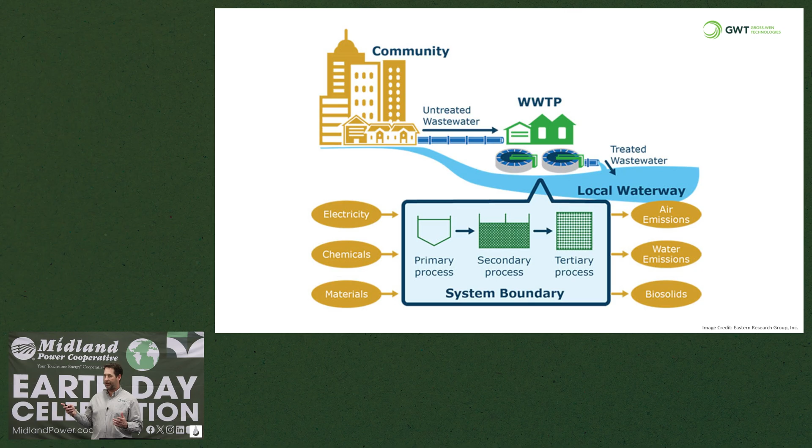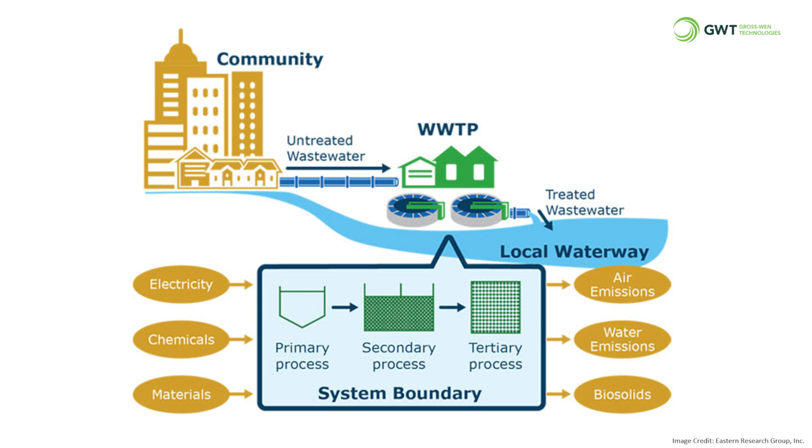So it takes electricity, a lot of electricity, and I think I'll prove that to you here shortly. We also add chemicals, all sorts of different materials into those wastewater treatment plants to create clean water to be discharged. It comes with air emissions. We're creating a biosolids product also that needs to be discharged. So it is a very energy consuming process.

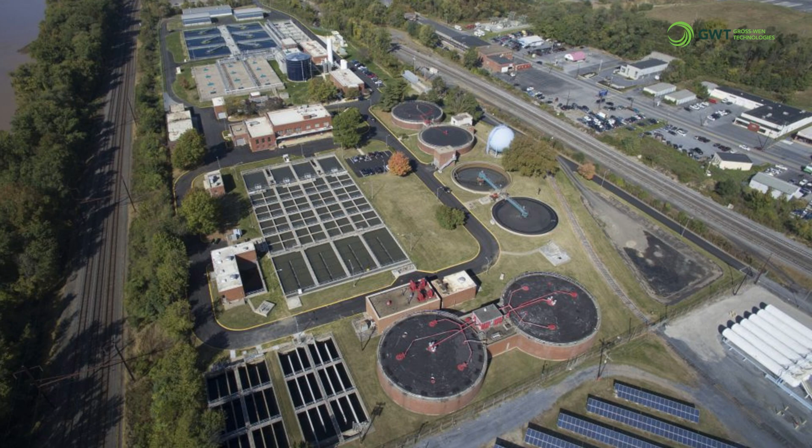This is a typical wastewater treatment plant at probably a mid-sized community. You can see it's a series of tanks, blowers, chemical addition equipment, drying equipment. Very, very complex in some communities.

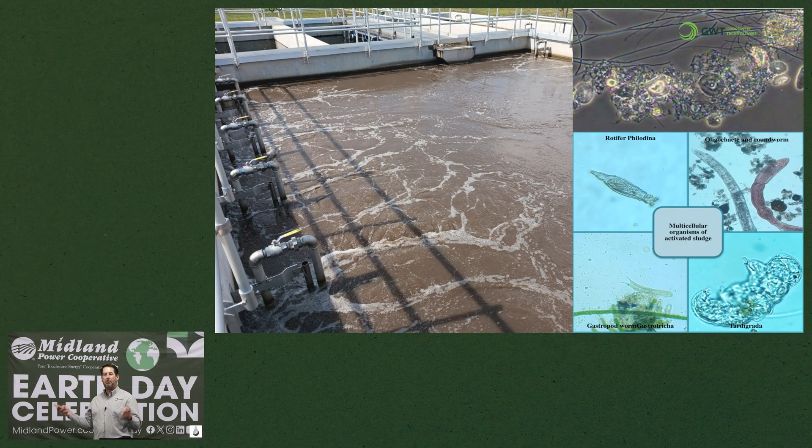Essentially, what we're trying to do in wastewater treatment, and this has been going on for 100 years, we've been trying to blow air into wastewater to create bacteria that will consume the organic material in that wastewater. Okay? Well, that bacteria is just like you and me. It requires a lot of oxygen, and it expels CO2 to the atmosphere. So we blow air into it continuously, 24 hours a day, 7 days a week, 365 days out of a year.

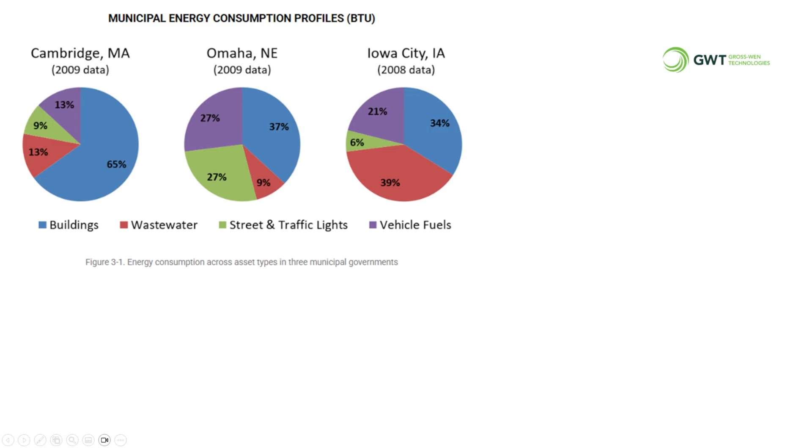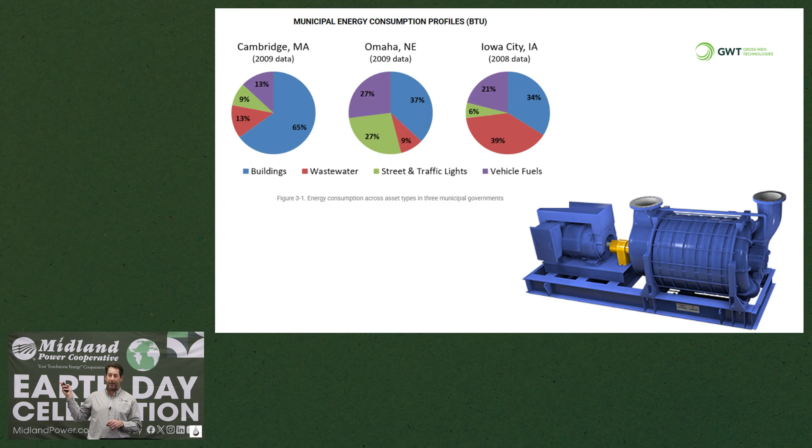In fact, for some communities, their government energy budget, which is comprised of heating and air conditioning buildings, powering street lights, traffic lights, all those vehicles that are out maintaining community facilities, and wastewater. Wastewater can represent up to 40% of a community's energy budget. That is a massive amount.

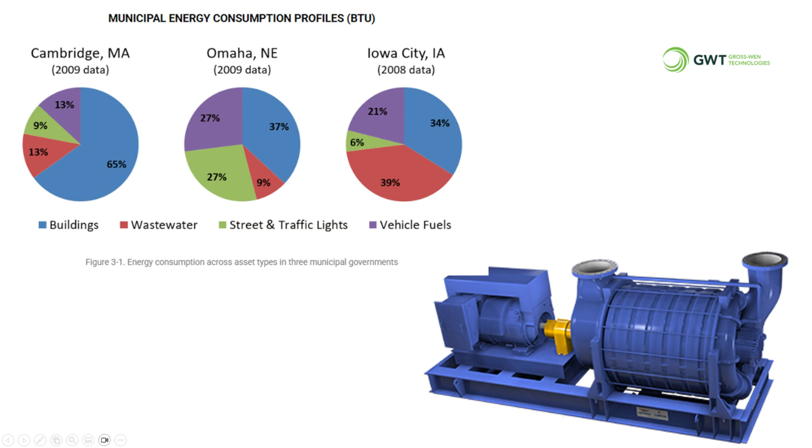In fact, if you think about our total greenhouse gas emissions worldwide, wastewater represents about 5%. That's 1/20, a massive amount. So we have a big problem and a big opportunity.

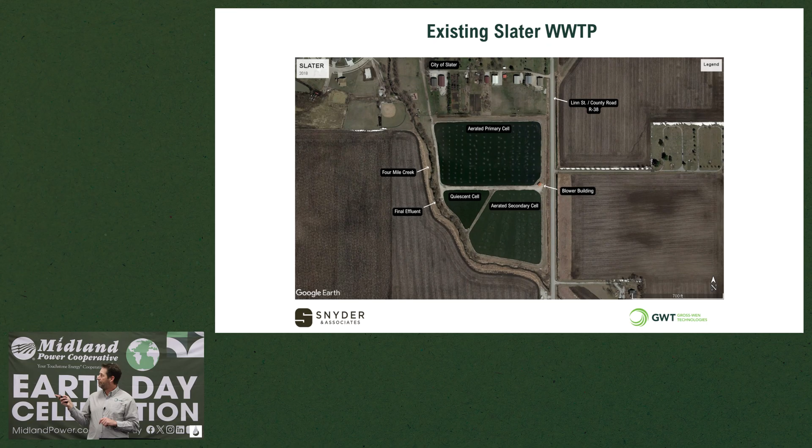This is a picture of Slater, where we have an installation, and this was their wastewater treatment plant prior to us getting involved. So it's a 3-cell lagoon. The primary cell has a series of blowers blowing air to create that bacteria. Then it flows to the secondary cell, and then the quiescent cell before going to the creek that is nearby. They had 3 blowers at 75 horsepower each, blowing air 24/7.

The state recently gave them new permit requirements. So they were meeting their ability to remove organic matter from the wastewater, but they were not able to meet their ammonia limits. Ammonia is a form of nitrogen that, in nature, is food for algae blooms, along with phosphorus. Right? We hear about those on the news all the time, where we've got a harmful algal bloom. No swimming. It's bad for aquatic animals, and so we're trying to get that ammonia out of our wastewater before it's discharged to the environment.

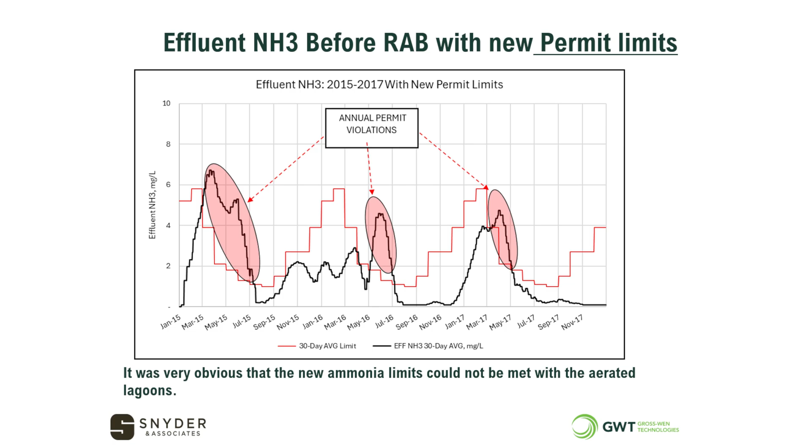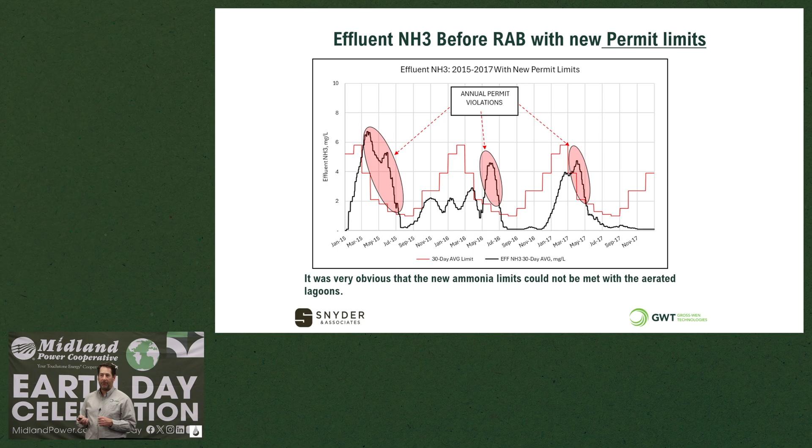So as you can see, in the 3 years prior to us getting involved, they were not able to meet their permit limits, shown in red. Obviously, it's seasonal. It changes, summer and winter. They were not able to meet the limit at certain times during the summer and winter.

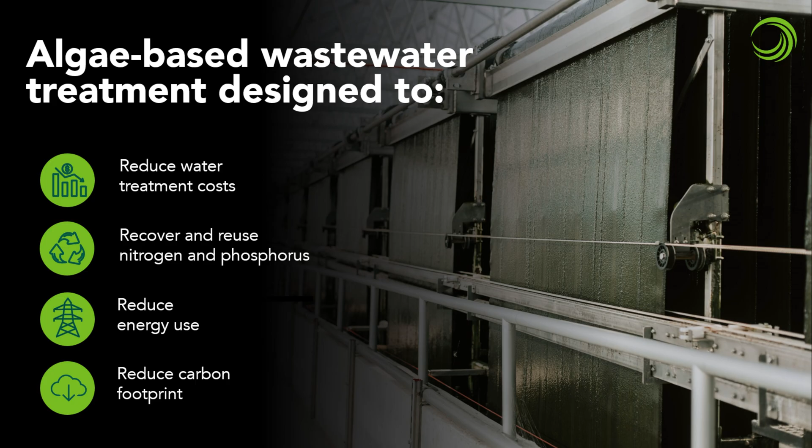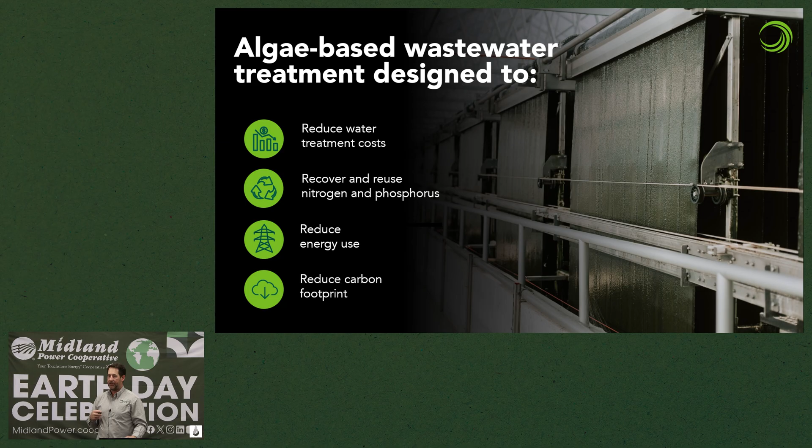So a little bit about what we invented, like I said, 10 years ago. We recover nitrogen and phosphorus, because those are valuable; everybody needs them for growing plants, right? And we're able to reduce the energy required to treat that wastewater. I mentioned bacteria expels CO2 to the atmosphere. Algae, as a plant, does exactly the opposite. It consumes CO2 and releases oxygen. Exactly the opposite.

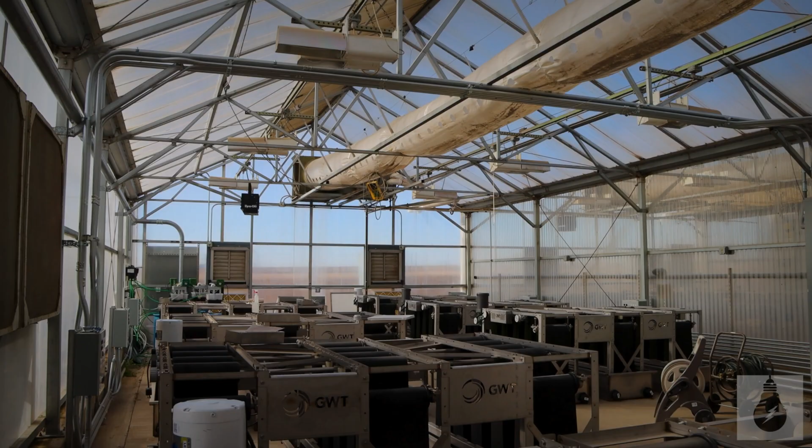Today we're in our research and development facility just outside of Boone, Iowa. It's a greenhouse that allows us to test our system on various wastewaters and how we can manipulate the algae to grow in a certain way that would maximize treatment, or to maximize the effectiveness of the end-use product that algae can be turned into.

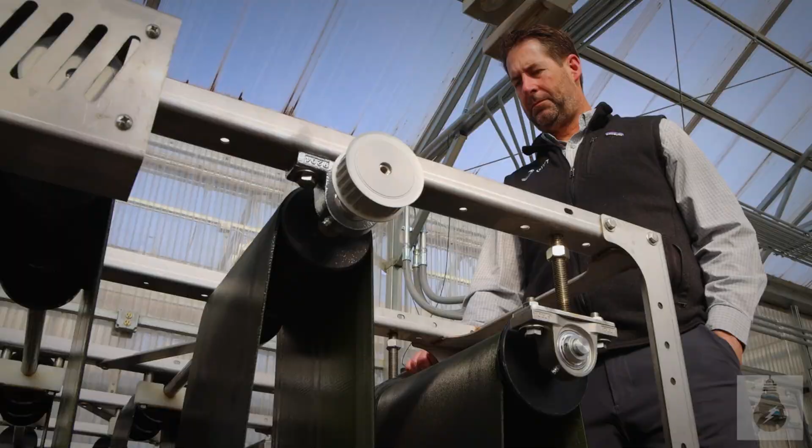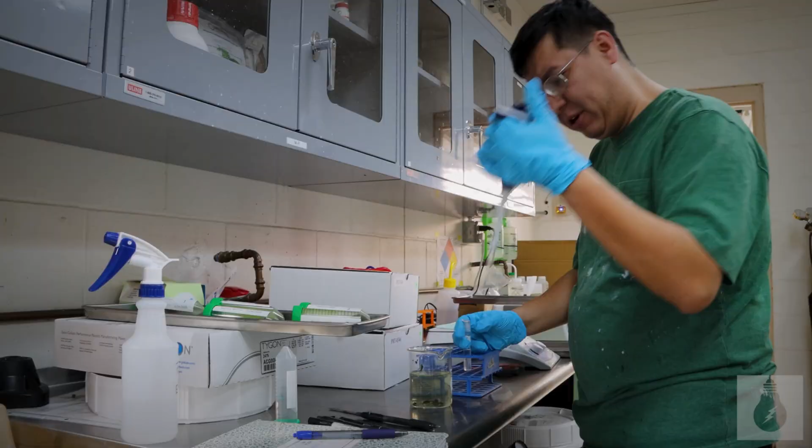This is the science behind what we do. We're at a smaller scale. We're treating different wastewaters to see how we can better the system, improve wastewater treatment, and also improve end use of that product, either as a fertilizer, a bioplastic, a biofuel, or as a feedstock, which I'm really excited about.

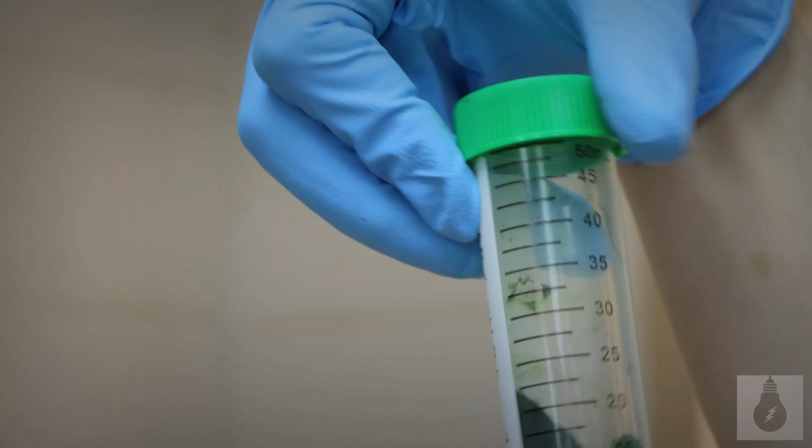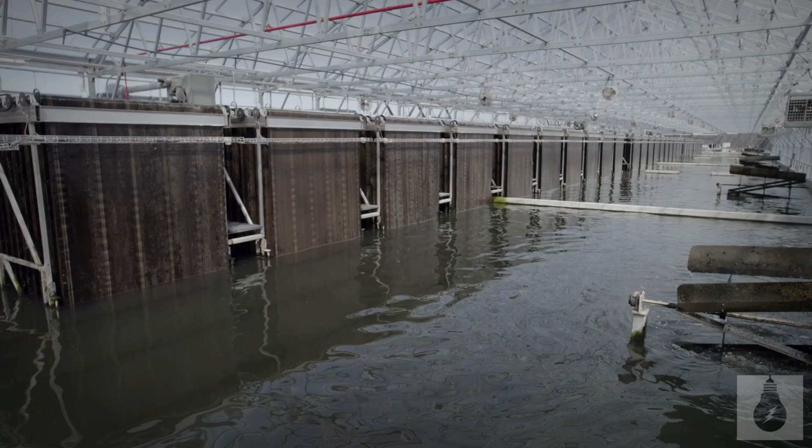We started with a pilot project in Slater. Then we moved to a full-scale demonstration project where we tested at a larger scale for over a year, a full-scale demonstration by the Department of Natural Resources. And now we have a full-scale installation where we're actually treating the city's wastewater to meet the discharge requirement.

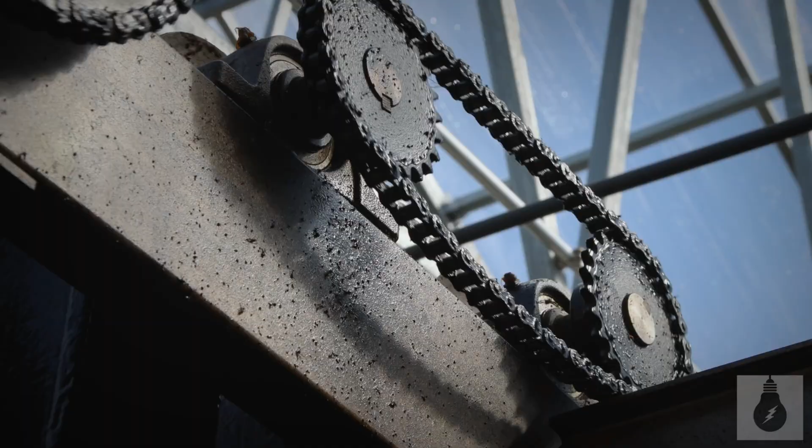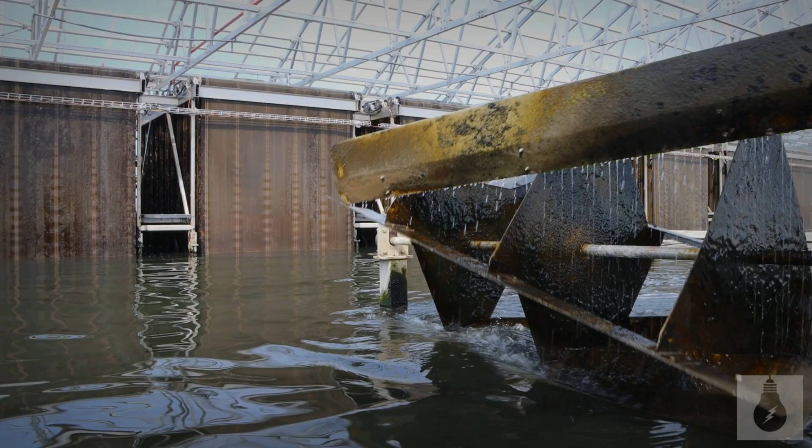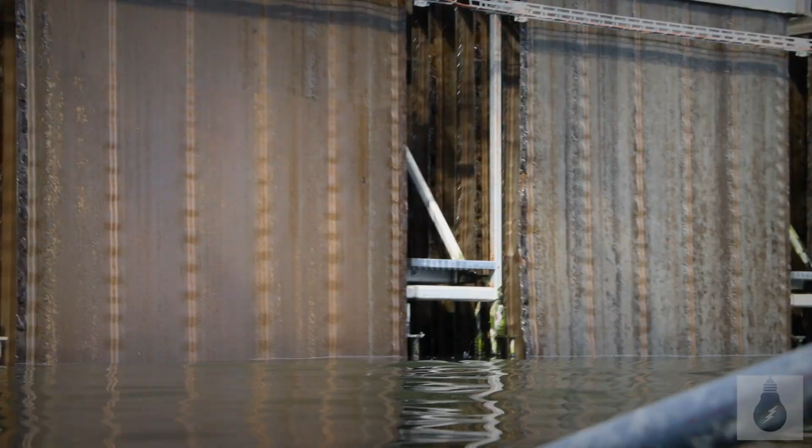So wastewater has been treated using systems that are typically very complex, energy consuming, chemical-based, which obviously require chemicals. Algae being Mother Nature's approach, we use algae to take CO2 from the atmosphere and deliver oxygen.

40% of energy is spent on aeration in wastewater treatment. That's a huge impact to the community. We greatly reduce the aeration that's required, and ultimately the energy that is needed for that system. We now have full-scale installations with that equipment. We're learning a lot about the system itself and improving how it's installed and what our most viable applications are.

We now see interest worldwide for what we're doing. Maybe I'll give you a high-level overview of what's actually happening on those belts that you saw in the video.

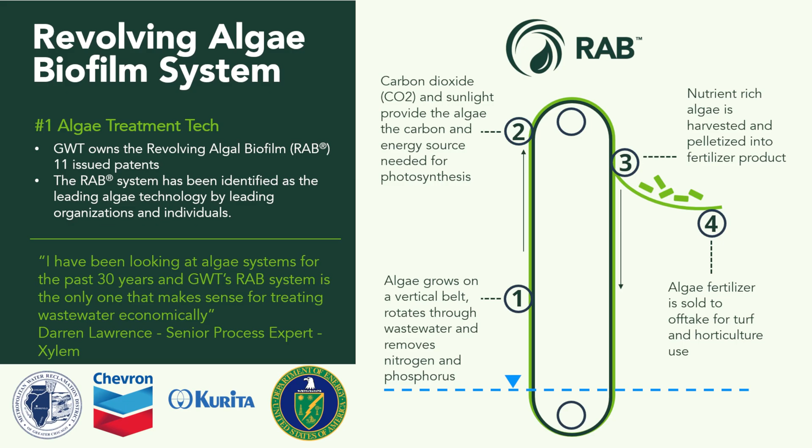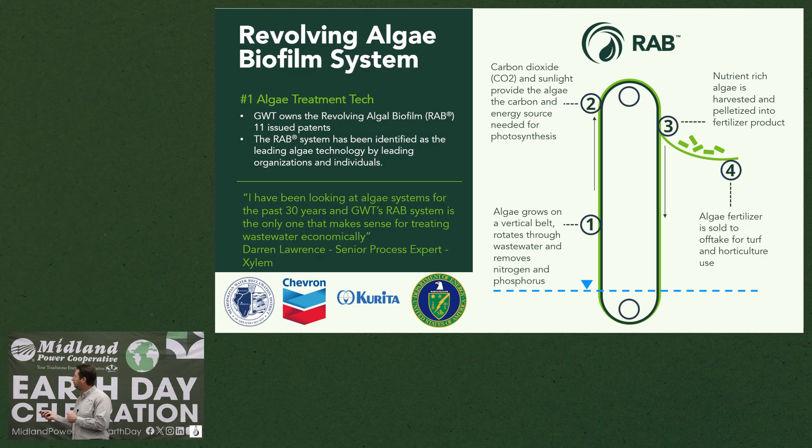So in position number 1, when the belts are rotating in the water, they come in contact with nitrogen and phosphorus. When they come out of the water, they have access to atmospherically available CO2 and sunlight, that's our energy source. In number 3, we periodically take the algae off the belts using a scraping mechanism and turn it into a useful product.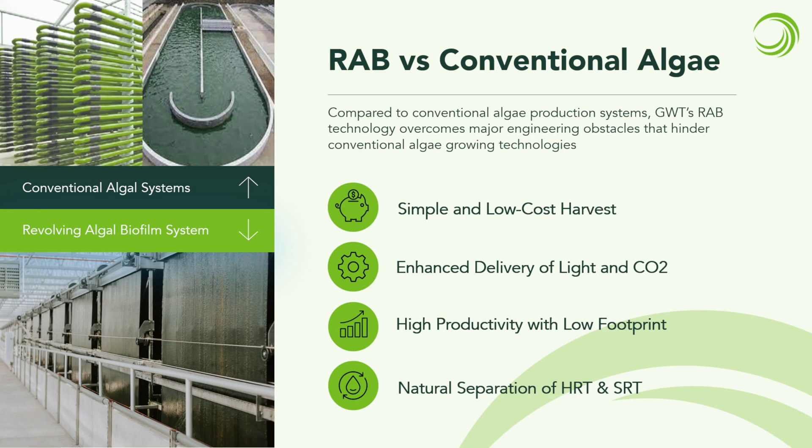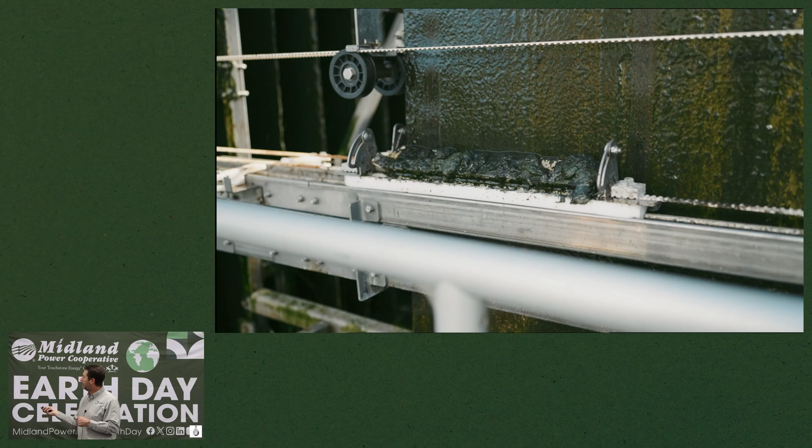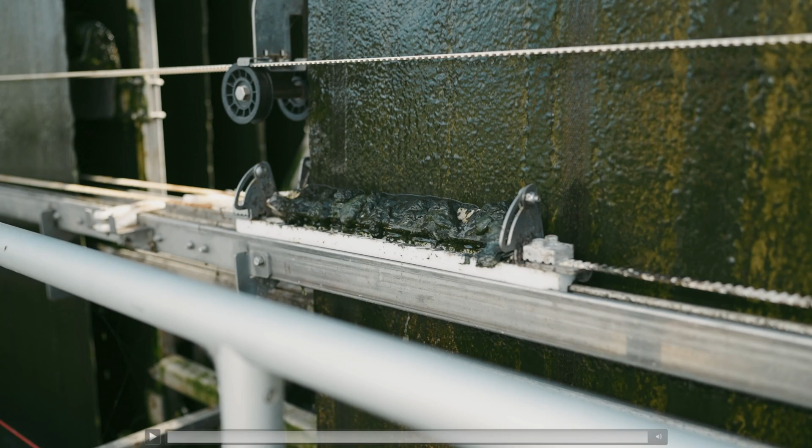High productivity in a relatively low footprint because we're going vertical. Here's a quick video, I don't know if this is going to show. That's basically what it looks like when we're scraping the belt to harvest that algae. We're removing the nitrogen and phosphorus that gets absorbed into those cells, and that's how we're removing nitrogen and phosphorus from the wastewater.

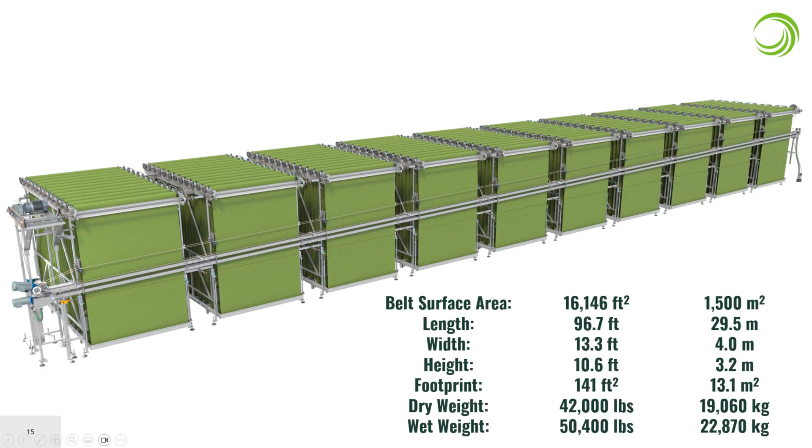So this is a depiction of a 10-belt module. We build these modules. Each module has one 5-horsepower motor, and then we have a couple additional fractional horsepower motors used to drive the scraping mechanism. It might be kind of hard to see, but there's a drive shaft that goes across the entire face up top, and so one motor can drive the whole series of belts.

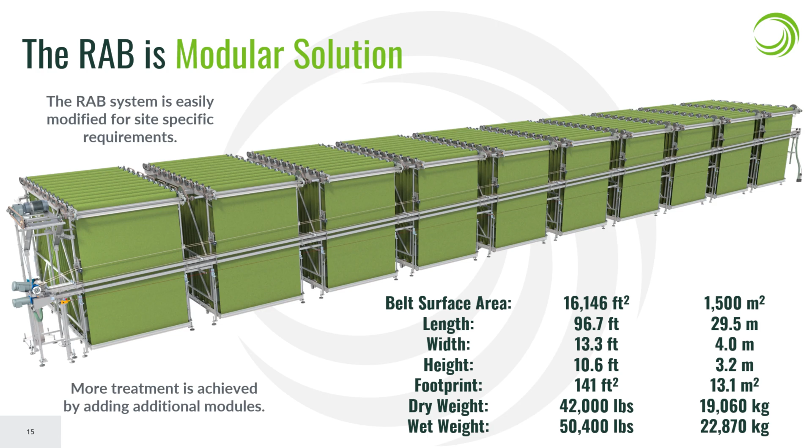It's very modular. So depending on how much material you need to remove from that wastewater, we can grow our system to meet the needs of a community or an industry.

This is actually a depiction of a large installation in the state of Washington, where we're removing...

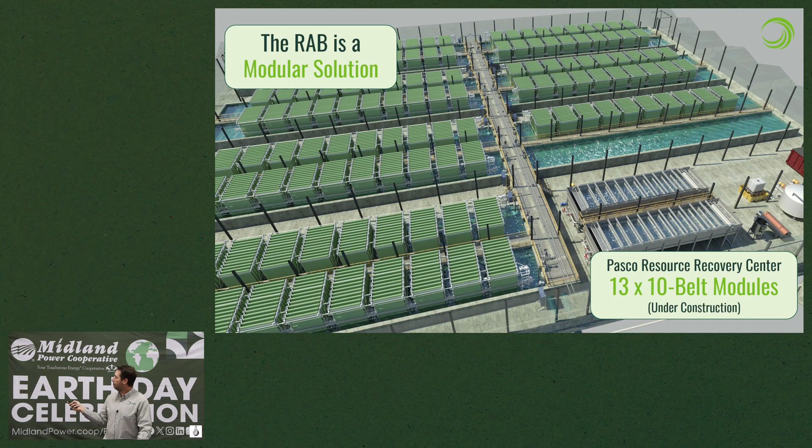I mentioned we turn it into a useful product. In the state of Washington, we can dry it and pelletize it and turn it into a fertilizer product. We can take algae and turn it into the soles of your shoes. We're working on a soil amendment product where we can take algae and put it into the soil. It puts carbon that we consumed from the atmosphere into the soil and also delivers micronutrients to plants. If you're using industrial-based fertilizers, they can eventually strip those micronutrients from the soil. So we're improving soil health by using this product.

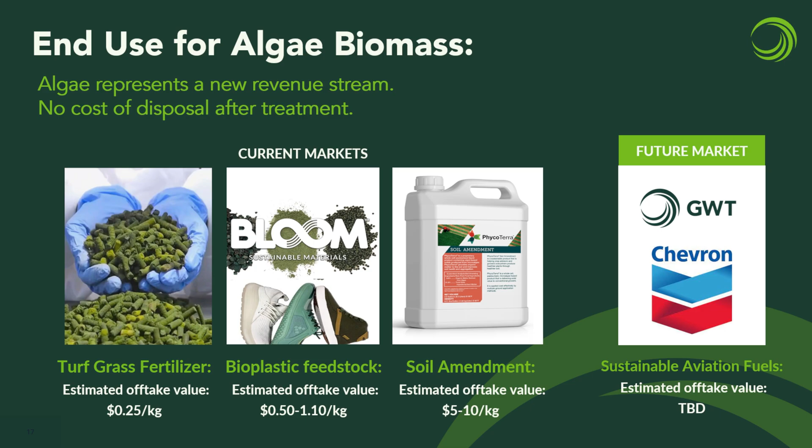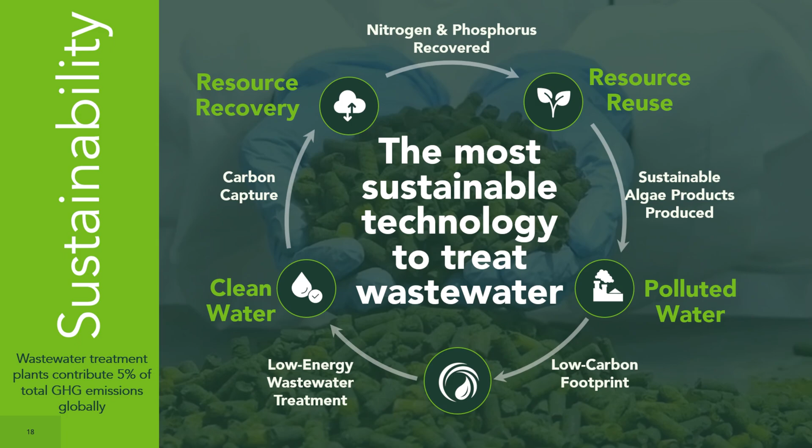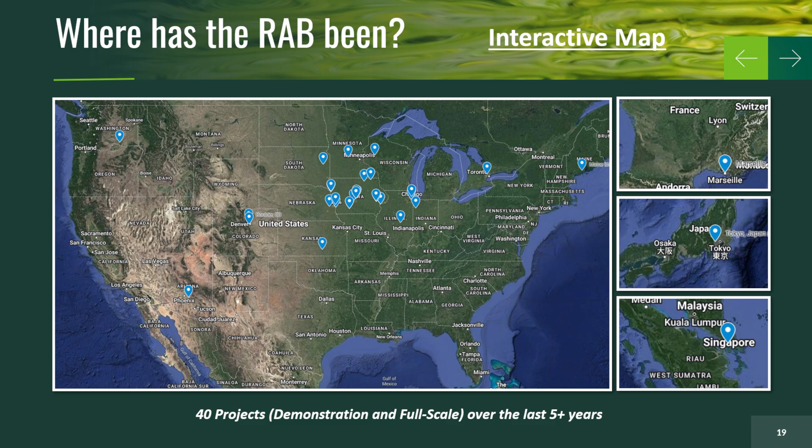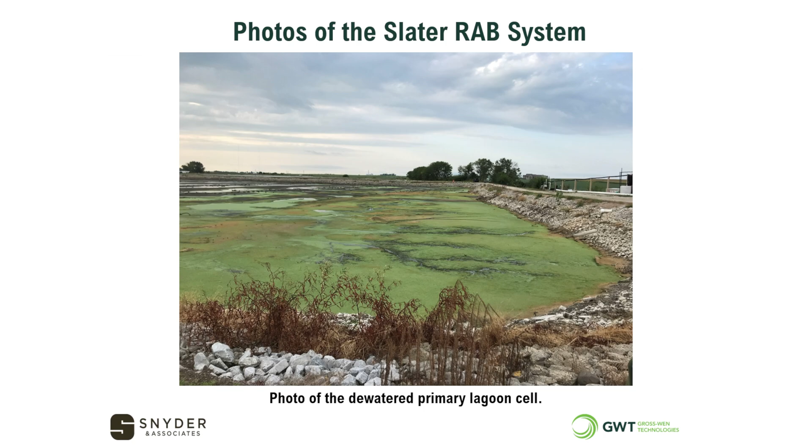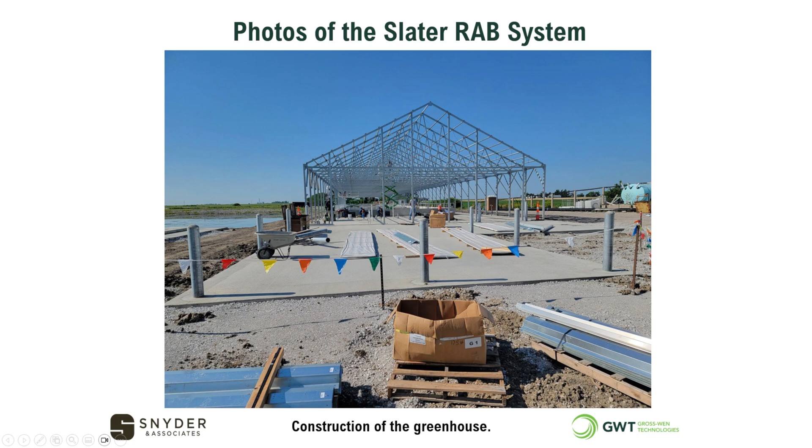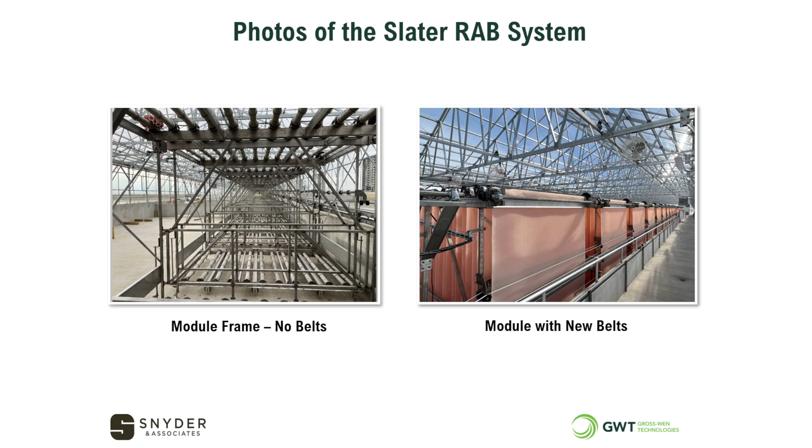Then, as you saw, our system is all within a greenhouse to allow naturally occurring sunlight to power the system. Here's our modules that have to be assembled in the basins, and then the virgin belts that are being hung on them have to be assembled before wastewater is added. Governor Reynolds in the state of Iowa has been very supportive of our growth, and she obviously was happy to be at our ribbon cutting there a couple years ago.

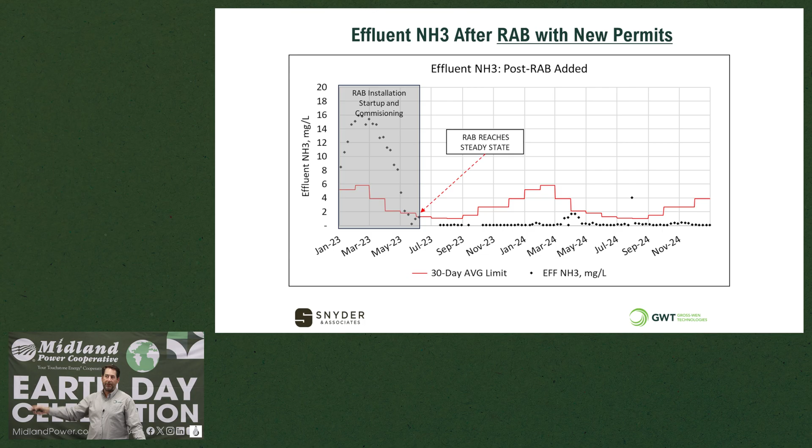Are there any questions online? Yes. Yeah, great question. So it's a polyester weave made by a large textile company called Milliken. And it's actually a material that's very reminiscent of another type of equipment that's used prominently in the wastewater industry, a belt press.

So when operators of our systems see that material, they're usually fairly accustomed to dealing with it.